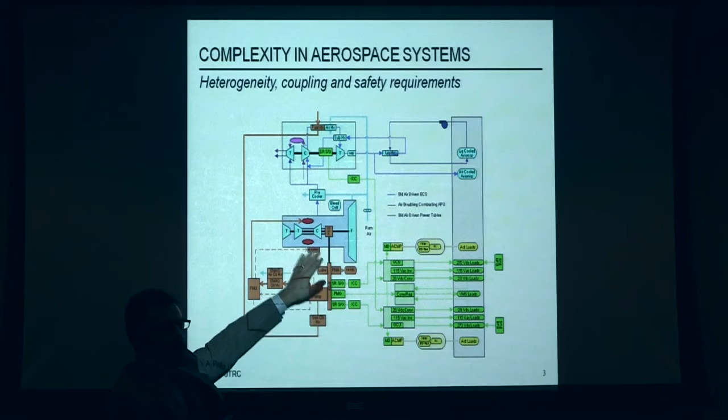So coupling is one issue, and the last part is safety requirements. This system must be somehow safe, and therefore there is all sorts of redundancy built in. If you look at this diagram, for example, you can see 3 generators here rather than 1. In many systems you have 2 engines rather than 1. And redundancy must be managed, which brings up all sorts of other complexity problems.

I think I was lucky because being in this company I was able to see the real system, and the real system is of course incredibly large. I was also lucky, in another context with Sikorsky, to see the assembly line and how complex that machine can be. Seeing it so big and so agile really makes you think there are big challenges that engineers as of now have been able to solve, but that could be a problem for future products.

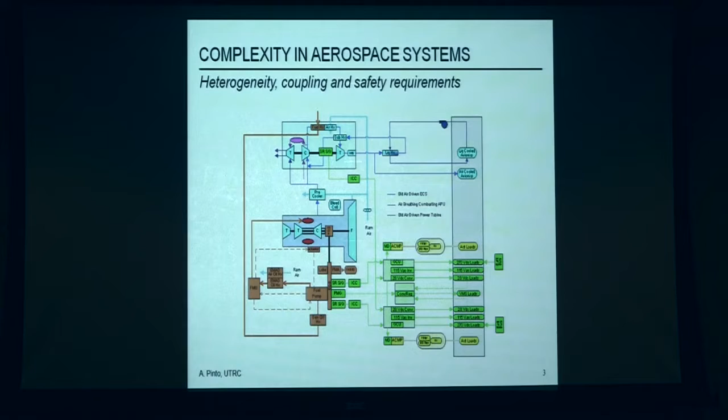Cost overruns are under the eyes of everybody with the JSF program, for example. That was one of the motivations that pushed DARPA to establish a program, the Adaptive Vehicle Make program, where we actually participated as performers. This is a slide I took from Paul Eremenko, who's the program manager there, and what this diagram shows is somehow a rough notion of complexity. It's already a different talk to discuss what complexity means.

But roughly, what the diagram is trying to say is that even if complexity of products has increased across different businesses, be it the semiconductor industry or the automotive industry, the development effort has been maintained at the same level for these two industries. One big difference is the aerospace industry, where the development effort increased exponentially. So one objective of this program was to reduce it by 5x. That was the overall goal.

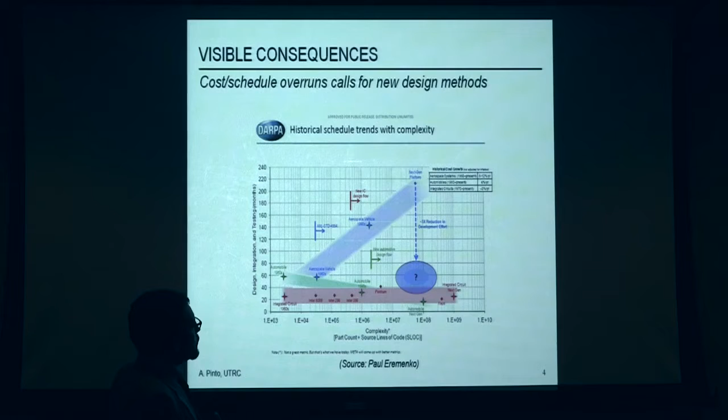What has been noticed is that both in the silicon industry and the automotive industry, at some point in time there has been a radical change in the way we design things. VLSI design saw the introduction of tools, and the automotive industry the same. That didn't happen for the aerospace industry, which is still using the old military standards. So the objective is to change the way in which things are done.

As performers, we joined this program and proposed one system engineering effort: to develop a comprehensive system design toolsuite. What I'm going to talk about today is more the contract-based specification. The second part was to develop verification tools for systems with dynamics that are potentially distributed—these are really hybrid systems, if you will, but where uncertainty also plays a role, meaning that many of the system's parameters can be uncertain and characterized by probability distributions, for example. A full report is available on my website, and I will touch on just a few of the findings.

So this is what we proposed. Let's say what we noticed, this is what we conceptualized as important things to research on. This is a slide I took from Brian Murray, who is the group leader in the embedded system group, and I work for him.

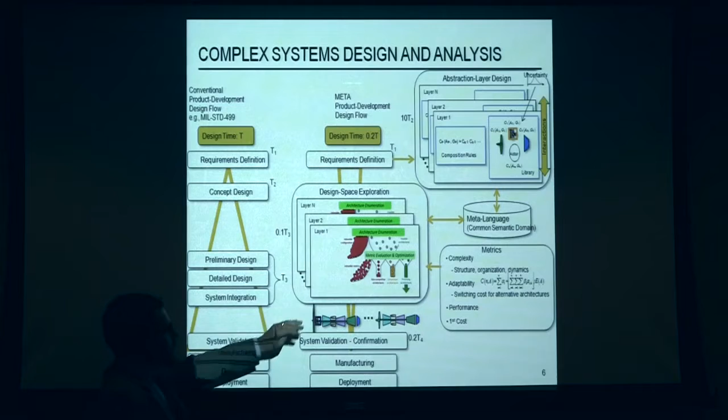So to do that, what you need are several different things. First of all, you cannot design the entire system just looking at the very details of everything. So what you need is to divide your design process into abstraction layers, where you start doing system-level trade-offs and then refining your subsystems. And of course, you need a virtual engineering environment.

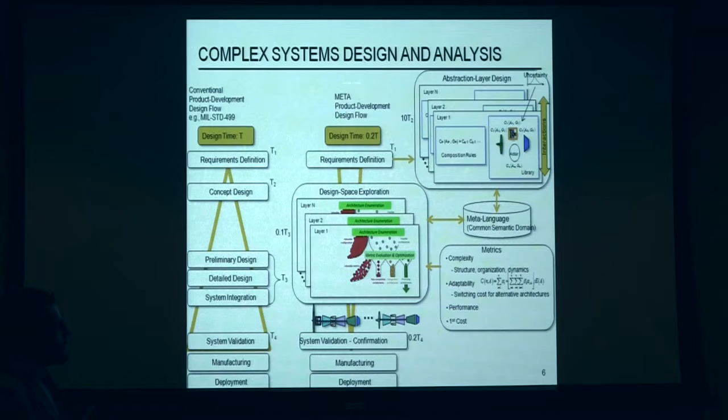So you need languages that are able to capture all the different aspects of the design. And when you look at that specific aspect of the problem, what is the right language to use, or the right set of constructs to use, then you find pretty much that the contract-based aspect or specification of the system is what you really need. I'm going to motivate this with some simple examples that you may find useful.

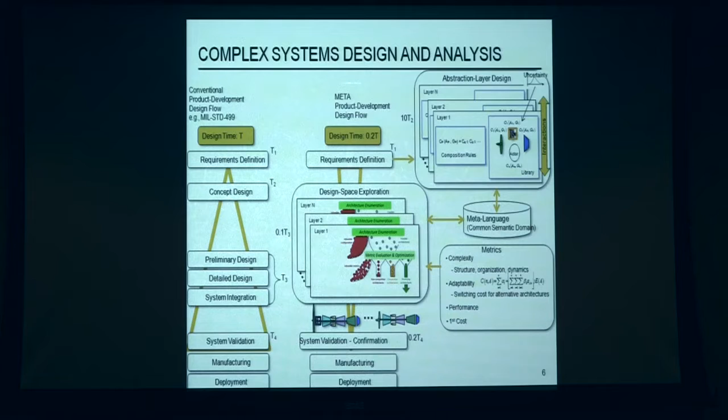A lot of other things we considered during this project is the notion of when your product is really optimal for the system you're trying to design. So you need to start defining all sorts of different metrics, including complexity, of course, but adaptability is another one. Maybe 5 years from now, the government comes back with a whole set of new missions—can my system adapt quickly to this new set of requirements? But performance, first-time cost, maintenance cost—there are all sorts of different metrics you can define.

So we couldn't really build an entire system. We had models though, and looking at the models, a professor from MIT, Olivier de Weck, was able to put together a model of the system design process and actually prove, at least on paper, that this new way of designing systems could actually lead to a 5x improvement, or a reduction in development.

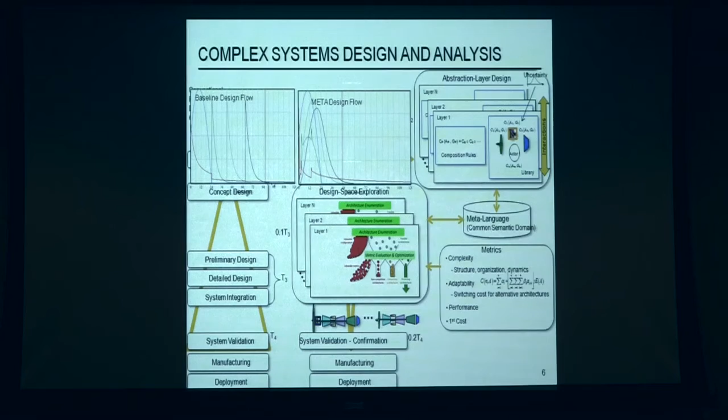So why is the language so important? Well, first of all, we talked about the virtual engineering environment, and therefore we need to have models, right, rather than actual real pieces of hardware. And this is not really code. Right? If you only have code, you don't go much far. What you really need is models in some sort of formal language.

However, you need to deal with legacy models. How do you bring them in? So we talked today about the notion of interfaces, which are critical. And that's why eventually we relied on contract-based design, which is a nice way to capture these interfaces.

What are the modeling requirements, if you think about it? So we need to be able to do integration, and we need to be able to have a way of going towards independent implementability. Because you have several different subcontractors, what you want to do is spec out your system, deliver the specs to your subcontractors, and if they design according to specs, you don't want to have surprises when you bring these pieces back together.

You need to have multiple related views. It comes back to the fact that we have experts that can do very detailed analysis of power quality in the system and tell you all the harmonics and stuff. And we have other experts that are able to tell you exactly what's the heat dissipation on every single box. These views must be related to each other, but you need to be able also to do this analysis in a separate way.

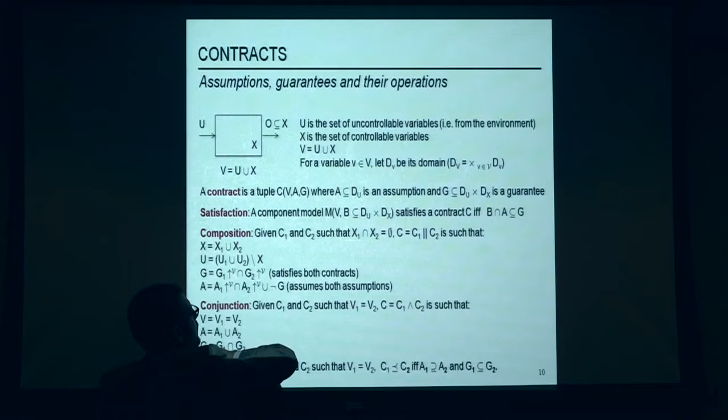You have the assumptions and the guarantees. The assumption is a limitation on the environment, saying I am going to behave according to the guarantees, which is a relation between input and outputs, if the assumptions are met. So this is the contract.

And once you define this contract, you can define all sorts of other stuff. So if I have a model, is the model actually satisfying the contract? You can mathematically say that. You can compose contracts. If I have two contracts, you can actually compose them and derive another contract, which is basically putting together system to subsystems.

You can do conjunction, and this comes back to different views of the same system. If I have an electric view and a thermal view, I can use the conjunction operation to come up with a single contract that brings them both together. So it seems to be a nice environment.

The other interesting property, the other thing you can define, is the refinement operation. If I have a contract and another contract, when can I say that these two are related by a refinement relation? Refinement is really a way of capturing when a component can be substituted for another component. So if it's more refined, in this context it means it can accept more environments and it can provide better guarantees, then I can substitute that.

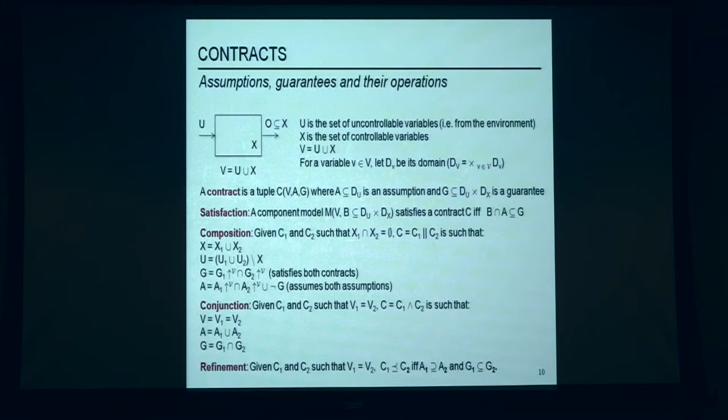When you go off and implement a tool using these operators, depending on how you represent the set, implementing these operations may be a big challenge.

So a high-level view: what can we do? We can have a component with several views associated with it, and use conjunction to write one contract. We may have a system with several components, compose them, and generate one contract, which is checked against the specification of a system. The system works. I can take a contract as a spec of another system, send it to a subcontractor and ask them to implement it however they want, using maybe two blocks, as long as my contract is satisfied. That's the refinement problem.

So it's a nice framework. It's really what we are embracing. Now, just from the general definition, you can prove some inference rules. For example, this is independent implementability: if I have two contracts and two models that implement them, the composition of the models would satisfy the composition of the contracts. And there are other rules.

But again, as I said, when you implement these languages, these operators have to eventually be implemented with an algorithm. So you need to be careful what you pick as a specification language. How do you capture sets? One way is a set of constraints, which define a set. If you're talking about behavior, a linear temporal logic formula captures a set of possible behaviors. So it depends on how you specify the sets, and these operations will change their nature and implementation.

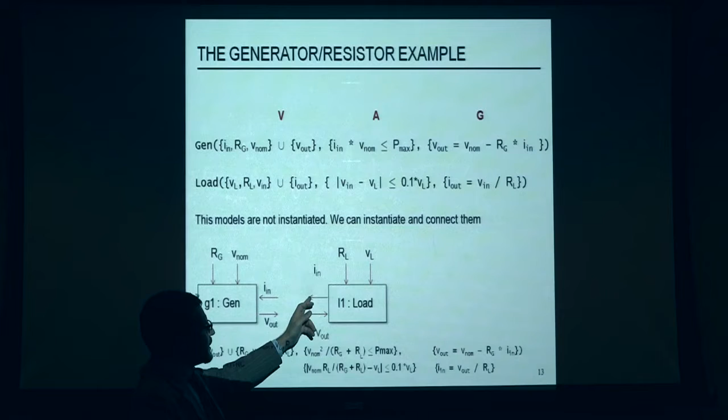So anyway, simple exercise, but the other quiz I have is: can we instantiate more than one load here? The answer is no, we cannot, because if I instantiate another load and call that output current again, I don't actually know anymore - the meaning is I would just put another equation here and the system would have no solution. What I really want to say when I instantiate another load is that the two currents would sum up to give the total current requirement. So I now suddenly have to add a new component, an adder that operates on currents and computes the sum, but I don't really want to do that.

So anyway, this admits that there is something missing in this framework. The second question is, can we instantiate an unconnected component? Yeah, I can instantiate a load. Although, if I have a product family - like I provide an electric power system, here's my product family, go ahead and put it on your aircraft - there could be an unconnected load.

So first of all, it may be a mistake or an error. But second, if it's not an error, it's done on purpose, then of course the airframer would ask me why do I need to carry this extra weight that is not connected to anything. So we need to be able to express what are the desirable properties that any instance of a platform, of a product family, cannot violate.

This is another thing that we need to be able to specify, and it's not in this framework yet. So we need two things. We need a way to define an algebra that can put together these quantities somehow, that tells us what are the rules of the world.

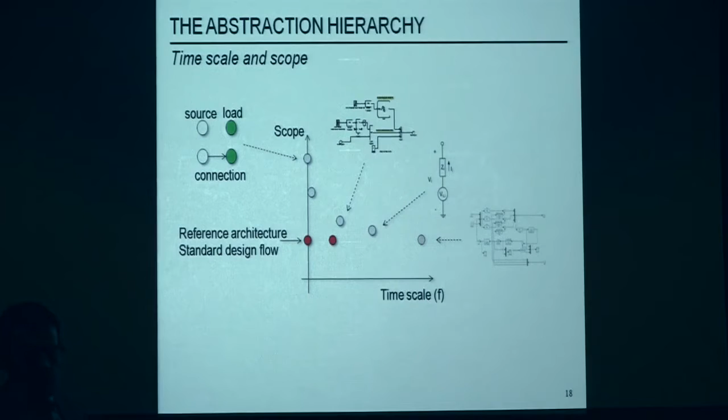That's one axis. And then the other one is scope, when I basically represent big chunks of components into one component and I define the interfaces. So we now basically looked at all systems that lie on this axis here. When we use actual models, we mix all this. It's a fluid level of abstraction somehow.

We typically go this way. We don't move just around here. Actually, this is the traditional process. We don't only move over the steady state axis. So how do we do that transition?

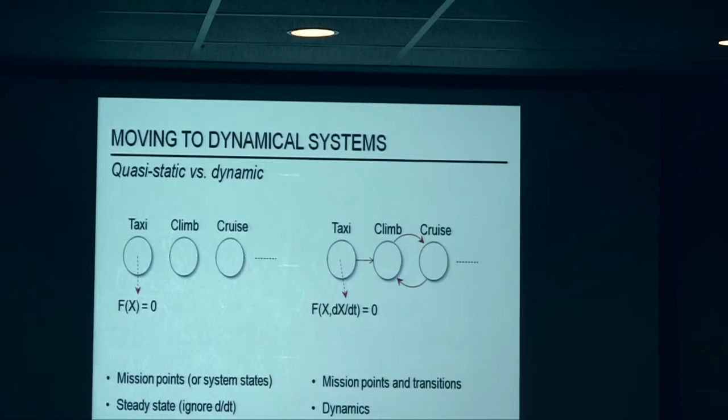Well, let me tell you quickly what that means. So we've considered this case where we have different phases. And what typically people do is check for the steady state properties in all of these states. It's called quasi-static regime. In each state, what you have is really a system of equations.

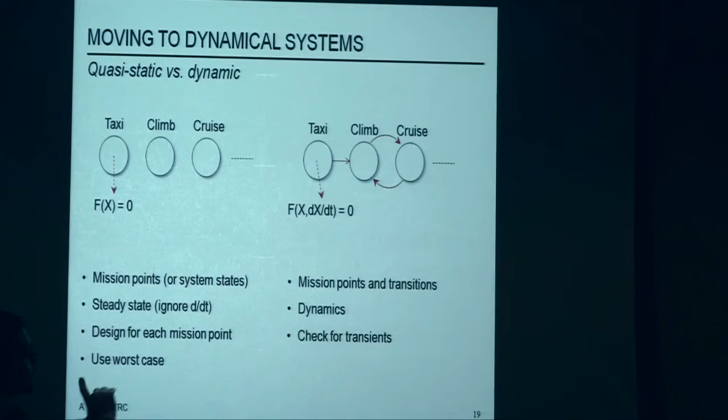Then, when you want to move to dynamics, you start including transitions among these states. What are the transitions that are valid, and under which switching conditions they happen. And in each of the states, you have a system of differential equations that define the dynamics in that state. So this is called also a hybrid system.

On top of that, you can add uncertainty, meaning that, for example, during a mission, you don't know if you're going to climb up, go down, and cruise. You don't know exactly how the state is switching. So you may include a probability because you don't know about the details of the maneuvers. Also, within each state, you may not know exactly how the system will evolve. There are sort of parameters - I don't know, weather, temperature, whatever you want to put in.

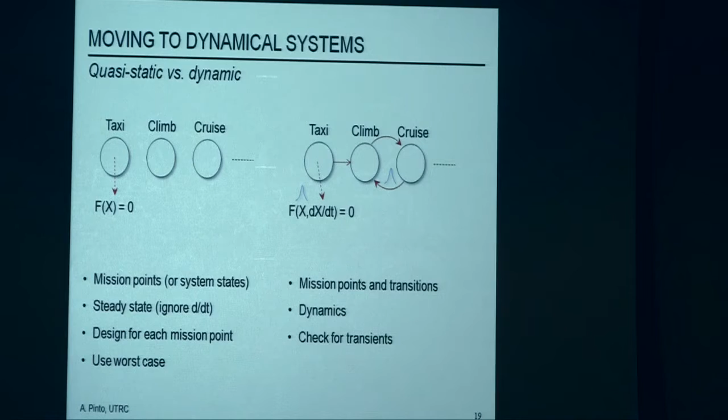So the problem that we had to look at, that we wanted to look at, is how do you analyze the system on the right. We then, first of all, fixed the mathematical framework, and we picked discrete time stochastic hybrid systems.

In these systems, you have modes of operations that you've seen before. You have continuous state spaces within each mode - these are continuous variables - and you have transitions between them. But what we consider are those systems where the dynamics within each mode is actually a stochastic map, so it depends on variables that have a probability distribution.

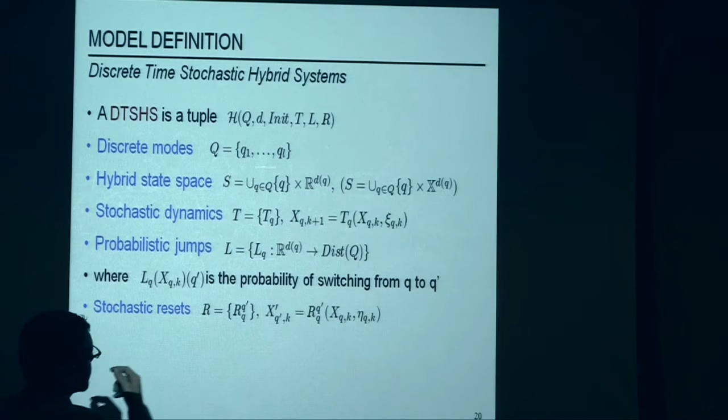We also looked at jumps between different modes that are stochastic. Instead of having a jump with a precise condition, the jump tells you the probability of going from one mode to the other. Finally, when you jump from one mode to another, you have a chance of resetting your state variables instantaneously, not deterministically, but according to a stochastic map. So if I start from taxi mode and begin climbing or taking off, I may end up in different states of fuel level, just to model that uncertainty.

That's just one example, and this is synchronous - the discrete time stochastic hybrid system is synchronous.

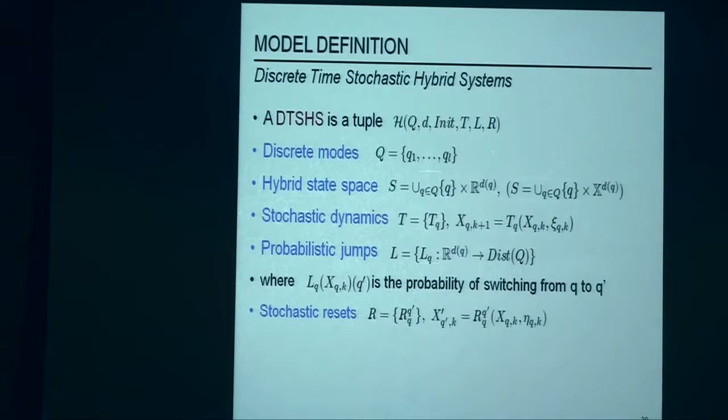We defined this with inputs and outputs and all sorts of other features which I don't have time to go through. An example is a stochastic bouncing ball - I'll give a more concrete example later, but it's a very simple one. In this discrete time view of the world, I have a bouncing ball where the actual acceleration is uncertain.

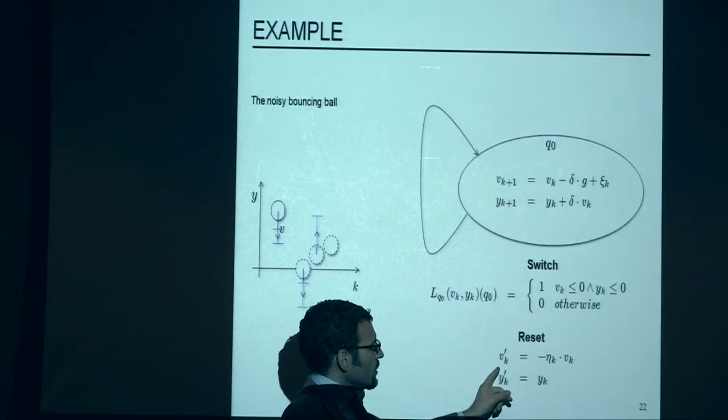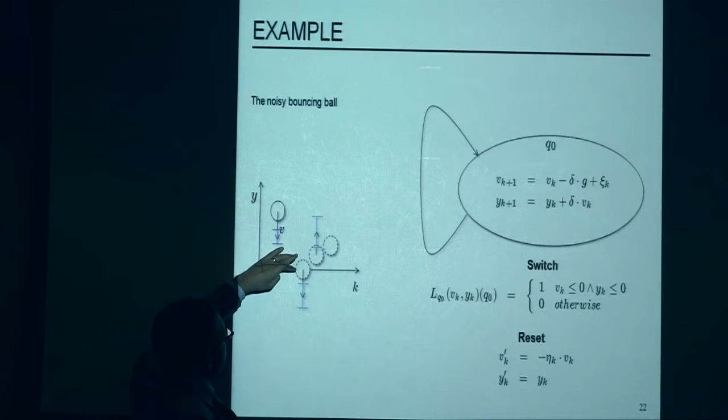Also, the restitution factor is uncertain. Whenever the ball bounces, the reset - instead of inverting the velocity with a deterministic restitution factor - is also uncertain. So the question could be: what's the probability that the ball will jump higher than a certain height, maybe higher than the height it started from? Because the acceleration is uncertain, imagine there is wind all over. That could be one question.

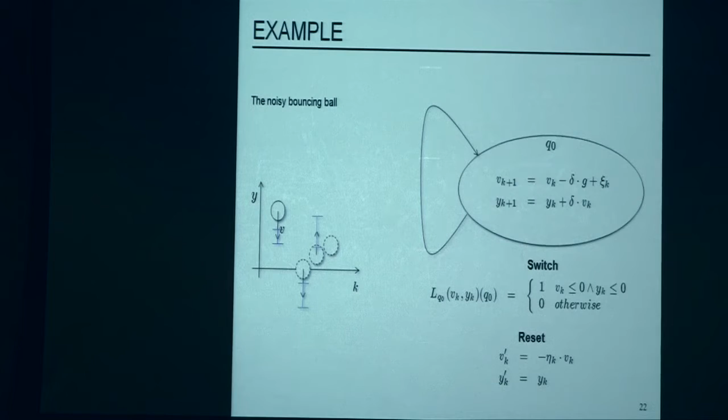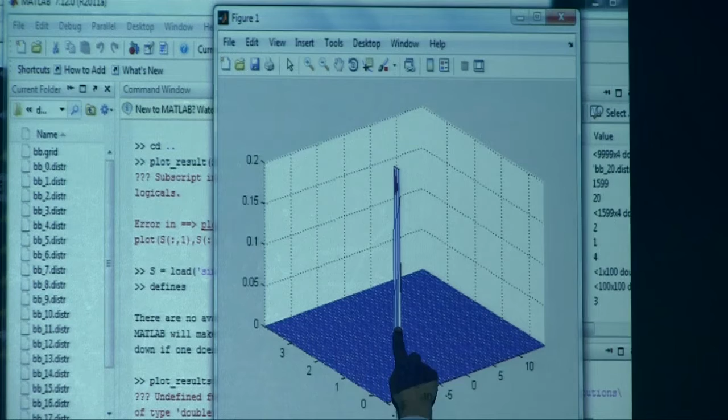The majority of the effort is in actually computing the full probability distribution and how it evolves over time. So this is the bouncing ball - this is the velocity axis, this is the position axis, and this is the initial probability distribution. I'm assuming it starts roughly at 2 meters high with velocity 0, but there is some uncertainty around it, which is why the probability distribution is not a single point.

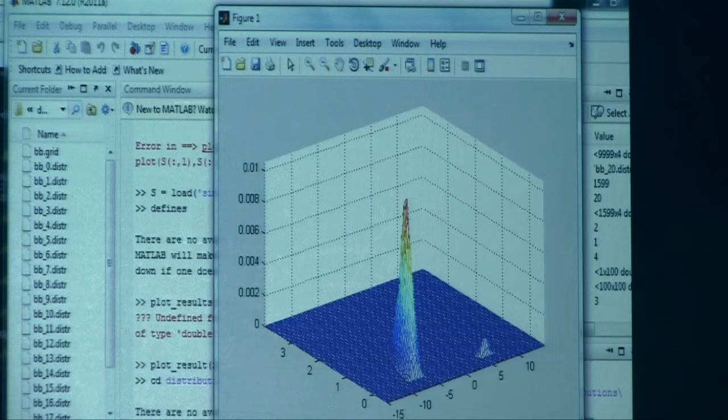As we start evolving time, this probability mass starts moving, and of course it has to spread out. Now here it starts jumping back - for all those events where the probability distribution covers states that hit the ground, they start bouncing back, so that probability mass shifts to the next mode. Then you can go on and simulate the full probability distribution.

You can do all sorts of other analysis, but I wanted to get to some conclusion before the time goes by.

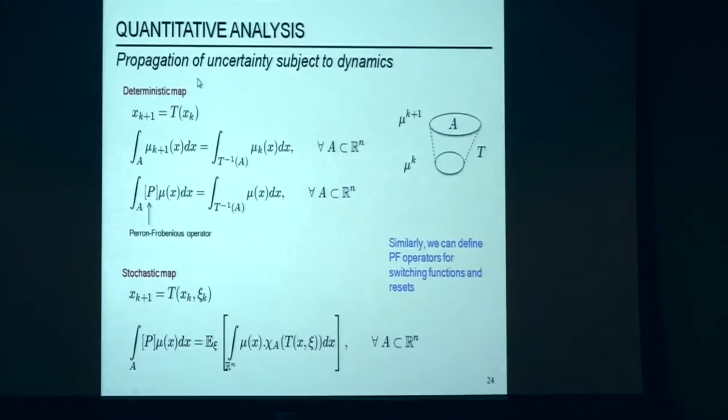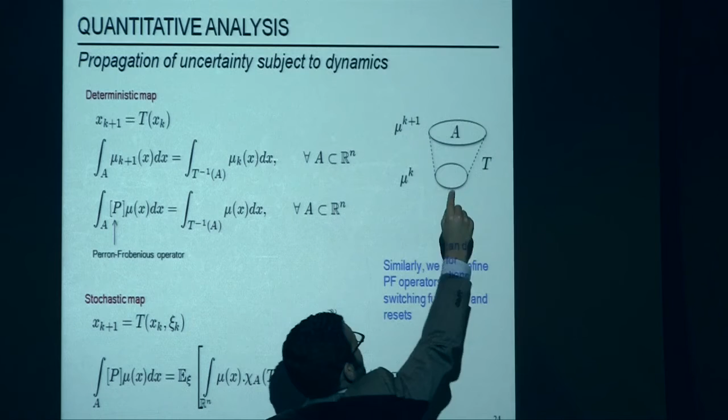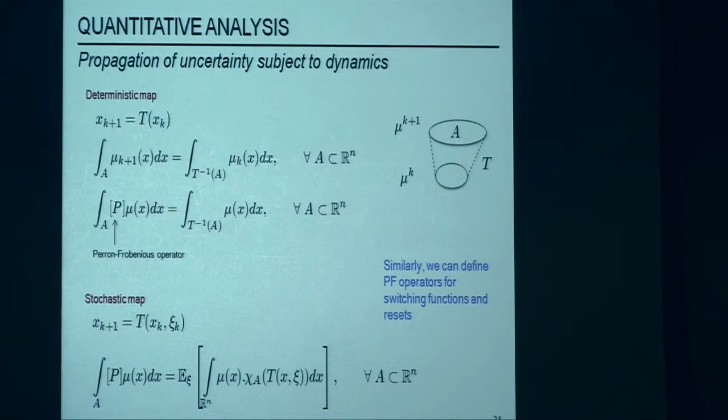The main idea here is not too difficult. Let's say you have a probability distribution over a state space, call it mu. You want to understand how this probability distribution mu at time k translates into a probability distribution mu at time k plus 1. The condition that needs to be satisfied is the following: for any set A, the total probability mass in A at the next time step needs to equal the total probability mass if you do a back projection of A according to your map. If it's a stochastic map, there's an expectation you need to take. But what you're really doing is moving forward these probability masses, and to do this you need to discretize the state space, which is part of the problem.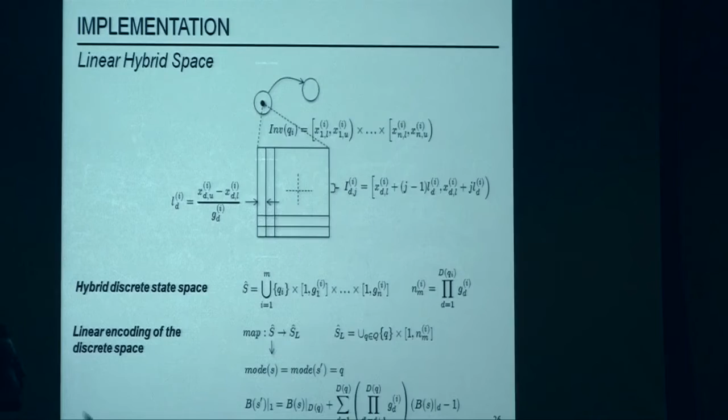So for each mode, you have a continuous state space which you have to discretize. There are techniques, but at the end of the day, if you cannot make assumptions on the dynamics, meaning the stochastic map, you must discretize. And of course, if the discretization is very small, if your cells are very small in your state space, then these algorithms become very complex.

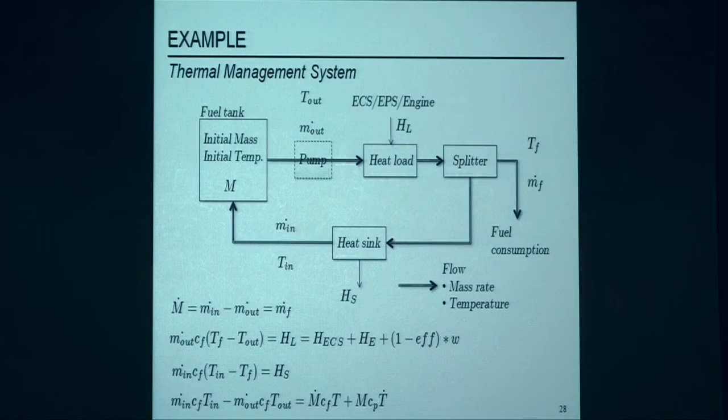So what we realized, we did apply this to the case of a thermal management system, where we have a fuel tank with an initial mass and temperature. There is a pump that pushes fuel through the fuel circuit, and heat is dumped into the fuel. Part of it goes to burning in the engine, part of the fuel goes back to the tank, going through a heat sink that is typically cooled down using external ram air. So the question would be: if I fly the entire mission, what's the probability that by the end of the mission, the temperature in the fuel tank is too high?

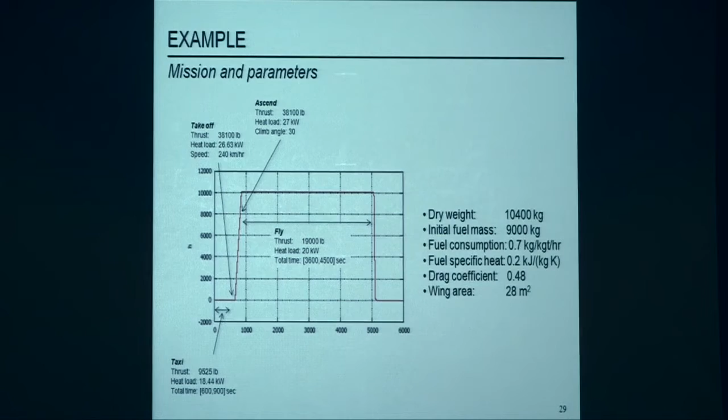So before that, you need to set up a mission. That's a very nice and simple mission. We have to set up parameters like climb rate and all these other things. And we model this again as a hybrid automaton that goes through different states, with stochastic transitions. Eventually, we were able to compute this in roughly half an hour with a lot of optimizations on the model, because otherwise it's difficult to run.

How many modes? Say that again? How many modes? There were, I think, 7 modes or 8 modes.

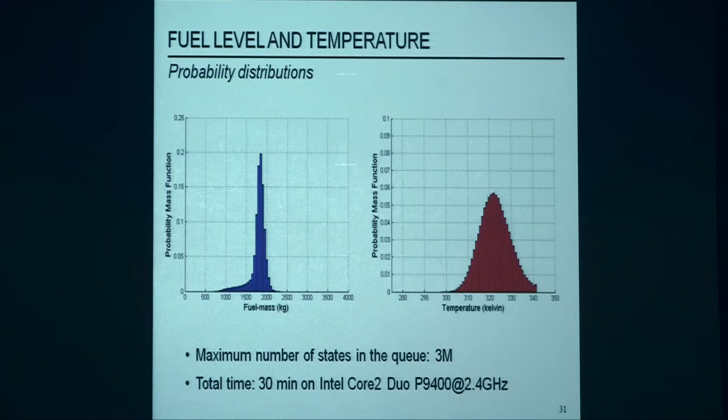But the problem we discovered, well, we realized, everybody realized, so it's not a discovery: the problem is not the number of modes, but the number of continuous variables, because the complexity of this algorithm grows exponentially with that number, since each variable has to be discretized. And if you look at the actual limitation in practice, without claims that are untrue, but pretty close to reality, the limit is around 10 million reachable states of this discrete state.

So if you look at the number of continuous variables, this depends a lot on the dynamics of the system, but it's roughly 6 to 7 continuous variables. That's the limit, somehow. Nobody has been able to break it so far, unless the system has a very nice structure, but there are no such systems. And that means about 3 components. So this is the limitation. We cannot go further than that. We can handle 10 million reachable states, but it's not enough.

So the way we try to tackle this is two ways. First of all, using contract-based design. It's true you can handle only 3 components, but if you can verify a property at this level, the question is: can you take whatever you computed for a subsystem and just zoom in on that subsystem and verify that the property is maintained by the way that system is constructed? It turns out when you try to do this for probabilistic systems, it is very hard, because it's not easy to compose and check refinement among probabilistic contracts. So what we proposed is an approximate way of checking refinement. Again, it's approximate, and therefore the solution cannot be proved.

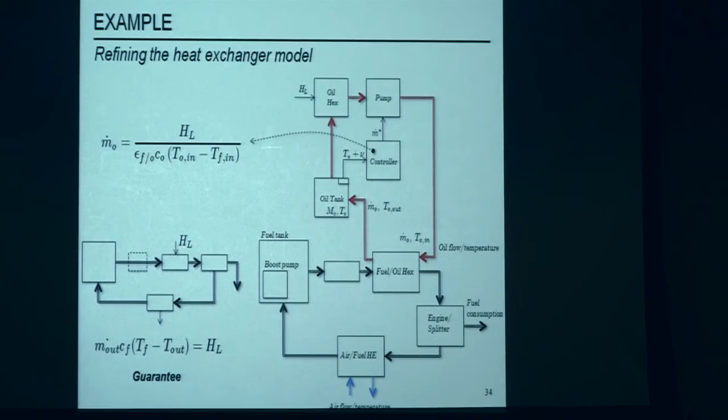And we started looking at approximate refinement, basically computing a distance from the original system to the actual refined system. The idea is to stimulate with the same probability distributions the two models, an abstract model and a refined model, and compute this metric, which is really a distance of probability distributions. Somehow you can do it, but again, I don't think this is the way to go.

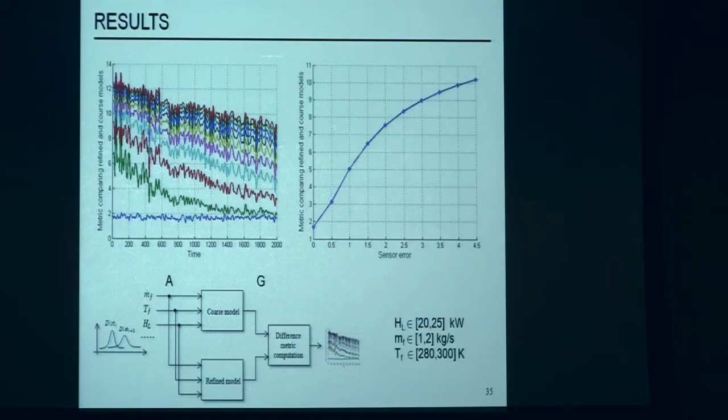It doesn't scale. So I'd like to conclude the talk saying that what we instead have done is go towards a synthesis approach. Rather than saying I have a property I want to verify, so I take my system and check the property, it would be much better if we had a process to say: I want a system that satisfies this property. How should the system be designed? So that's more a synthesis question.

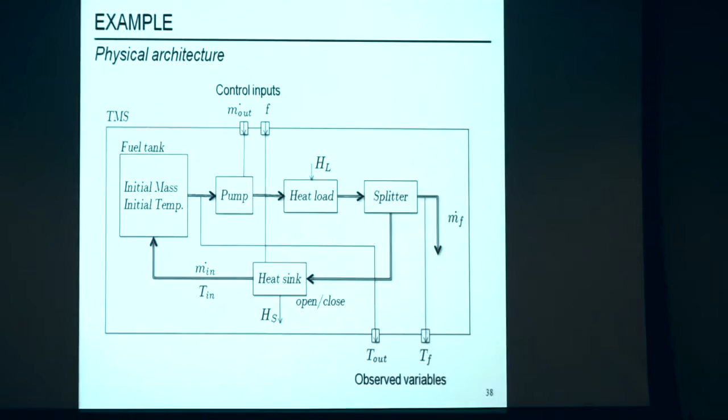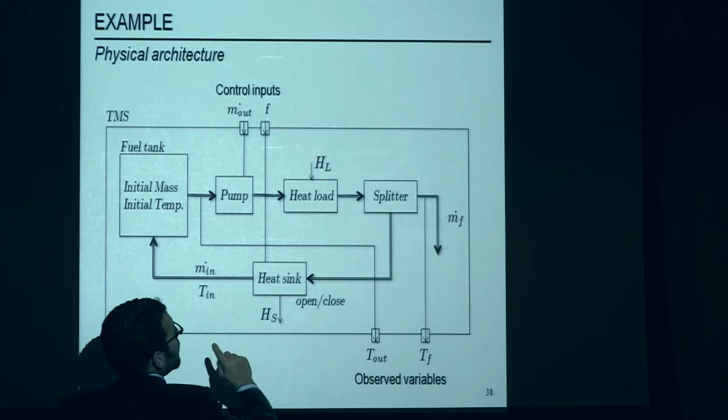One example, still for this system, is to say: let's say I have my thermal management system, and I can control the speed of the fuel by looking at the temperature, and I can control also the heat sink by looking at the temperature. Now the problem is, I want the temperature inside the fuel tank to be at a certain level with certain probability. What should the controller of the system be so that property is satisfied?

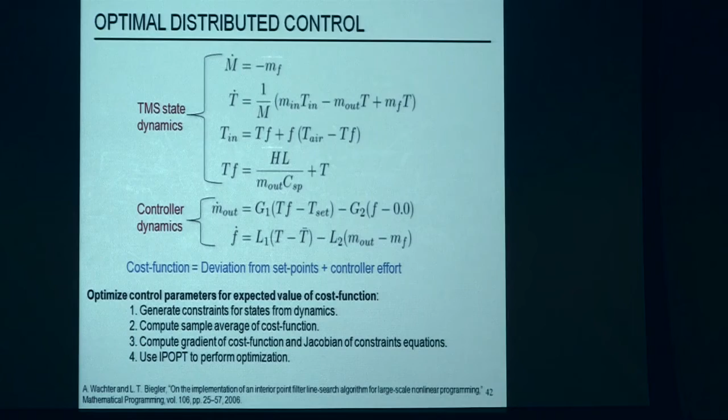So that I don't have to check. Of course this question may not be easy, it depends on the way the controllers are written and leveled, but we do have a way of doing this. We use stochastic optimization. We fix the control policies and leave them parameterized, and then we use stochastic optimization to enforce that the probability of having the fuel temperature exceeding a certain threshold be less than a certain value.

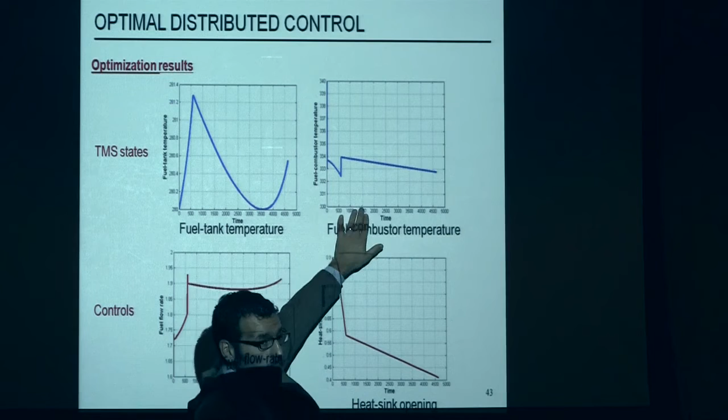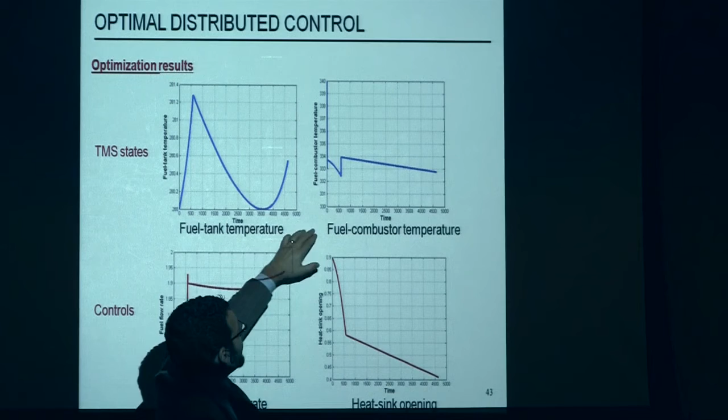And then we synthesize the controller, we flew the same mission, and let me check for the temperature. This was the temperature, we have two types: one in the tank, one at the combustor, just at the end when it enters the engine, and you have constraints on both. The optimization was able to keep this temperature always between 280 and 281.2, and then keep this other temperature within a tight bound around 333, but definitely no more than 340. That was the hard constraint.

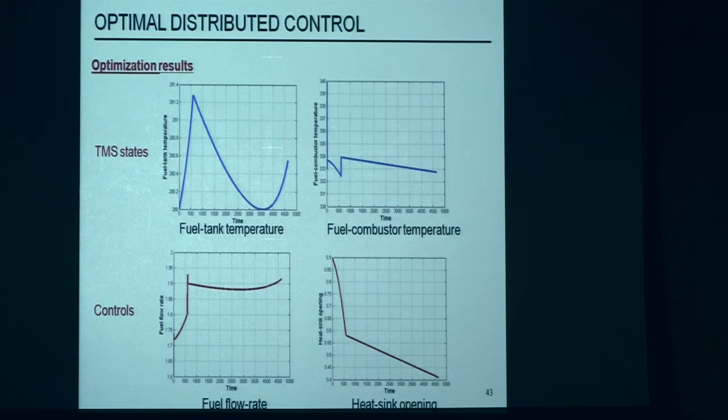So at this point we don't need to verify, because the system through the optimization already satisfies the problem. If we can construct the system so that we don't have to check, that's a better approach. And by the way, this has been done in many other cases. There are architectures that are safe, you don't need to prove anything about them, for example if you use a triple redundancy module, you know you have a certain reliability, you don't have to check.